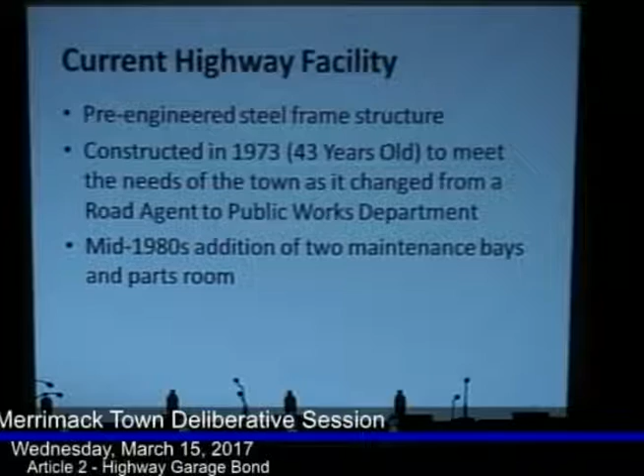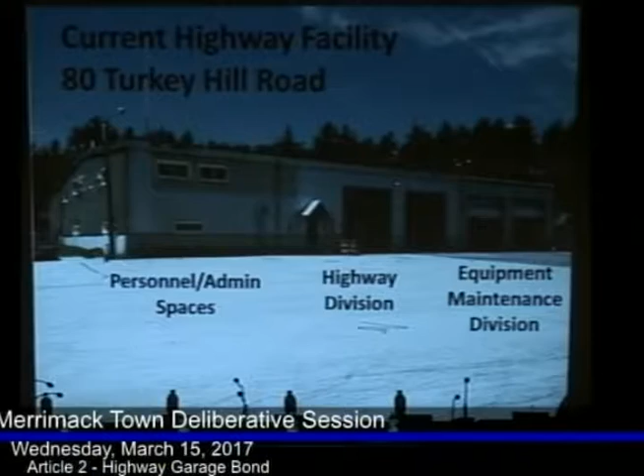That can be shown graphically over here on the right. It's hard to see, but I encourage everybody on your way out this evening to stop and take a look at our graphic boards over there. The one on the right shows graphically the roads that existed in 1973 when the garage was built, and the pink roads are all the ones that have been added since. That's just the public roads that we maintain - it doesn't include the private roads and the state roads.

The thing to particularly focus on is not just the length of road, because long straight roads are relatively easy to maintain. It's all of the intersections, the cul-de-sacs, and just the spread of the town. The town has gone from isolated pockets of population to being spread out over most of the area.

In that same vein, the board to the left shows the houses that existed in blue in 1973, and all of the pink spots are all of the houses that have been built since the highway garage was built.

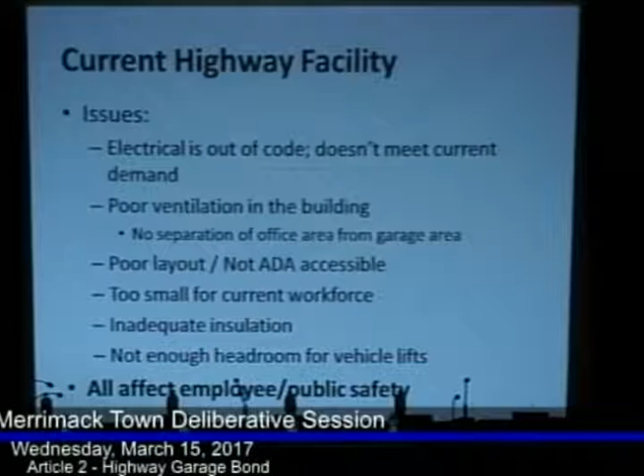There's poor layout, it's not ADA accessible, and it's just too small for the current workforce. There's also inadequate insulation and not enough headroom for vehicle lifts to lift vehicles properly. All of these affect employee and public safety. I'll stress that it's not just a building for us - it's also a building for the public to come in, vendors, contractors, and the like. So there's many folks other than just us in the facility.

Now I'm going to talk a little bit about what we're proposing in this project. We're planning to renovate the existing building - we're not tearing it down because it is still useful. As I mentioned at the beginning, it's a steel frame structure, and the steel is still in great shape. So our plan is to totally gut the building and use it primarily for vehicle storage. That will allow us to protect our $4 million fleet from the elements, resulting in a longer lifespan of our vehicles. It will also improve response time during winter storms.

Yesterday was a great example. When we left work Monday, we had all the trucks we could fit into the garage, and you'll see a picture of that coming up soon. Most of our fleet is outside, so when we get the call that it's time to plow, the operators have to come in, get the snow off of their truck, get the truck warmed up, take it over to the salt shed or the sand pile, get loaded with material, then they can go out. That can take anywhere from 45 minutes to an hour to accomplish.

Having vehicles stored inside, out of the elements, and in a warm place means we can preload all of the trucks. As soon as the guys get into the garage, they can be out on the road.

The other thing we would use the existing building for is to wash vehicles. We do that currently in the facility, and because of the high cost of a wash bay, we're proposing to still do that in the old building rather than add that into the new building as well. The estimated renovation cost for the existing building is about $439,000.

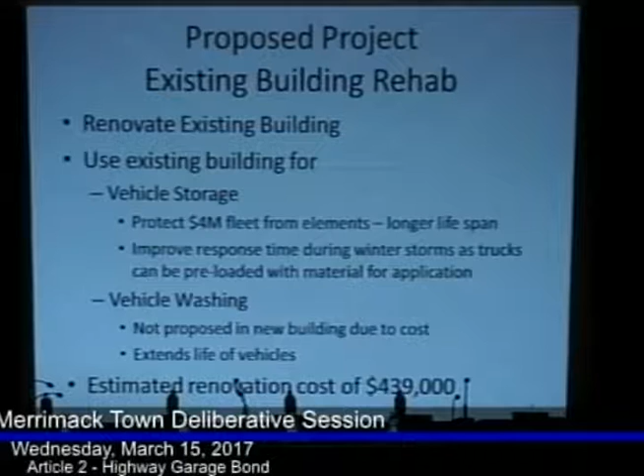One of the great parts about the project with the existing building being renovated is we're going to be able to take our heavy equipment, which now costs about $170,000 per unit for our six-wheel dump trucks, and extend our average life of them from 10 years to 12 years. That cycle will save us about $50,000 to $75,000 per year, and that'll be an ongoing forever savings.

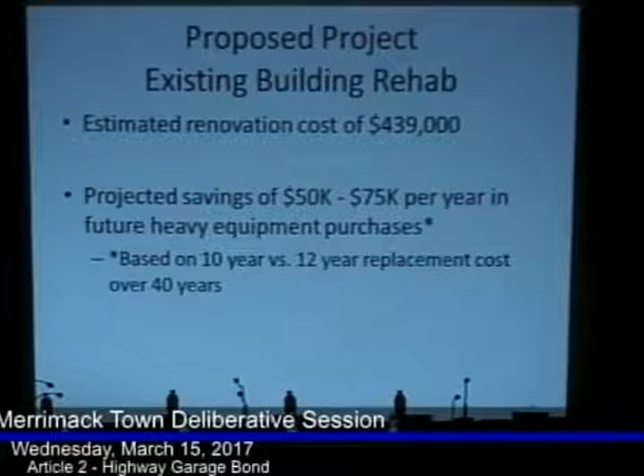Here's a picture of what the existing building might look like in the future. If you remember back to the original slide, we had that ugly steel-sided building, kind of an albatross in a residential neighborhood. We're proposing to change the siding of the building to a more residential feel, so it'll fit into the neighborhood much better.

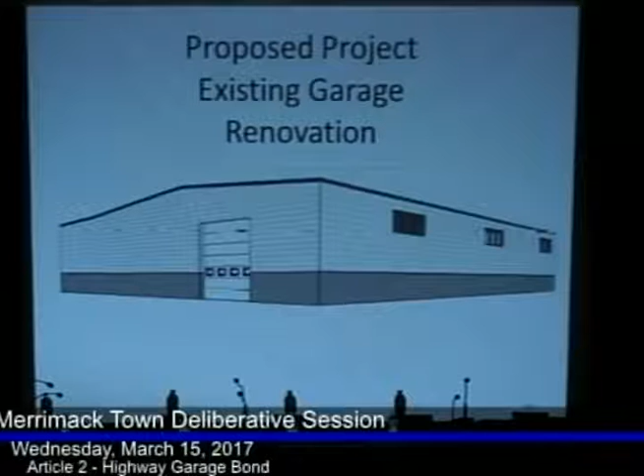The second part of the project is to construct a new building, and I'm going to talk about the 4 different areas of the new building, one at a time. The first area I'm going to talk about is the administration and office area, the conference rooms, and the entry vestibule. Currently, we have a little over 1,200 square feet in the existing building for this purpose, and we're actually decreasing this in the new building to just over 1,000 square feet.

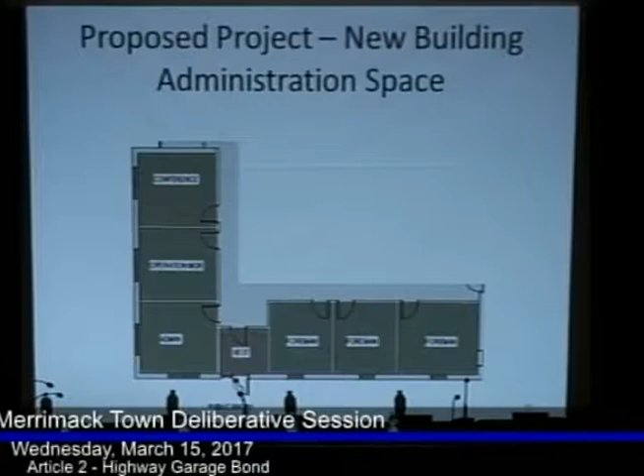Next, I'll move on to the common space, and this is really the biggest difference between the existing building and the proposed one. The new building will have adequate facilities, both male and female, for locker rooms, showers, and toilets, as well as public toilets, a much bigger lunchroom, training room, and kitchen area. Currently, we have just over 800 square feet for that, and we're almost doubling that at 1,700 square feet.

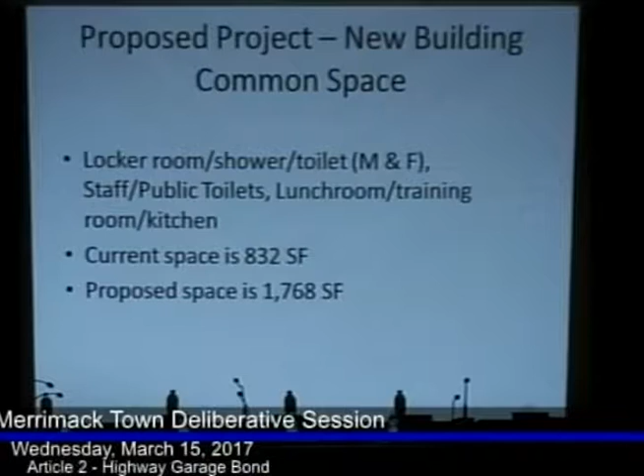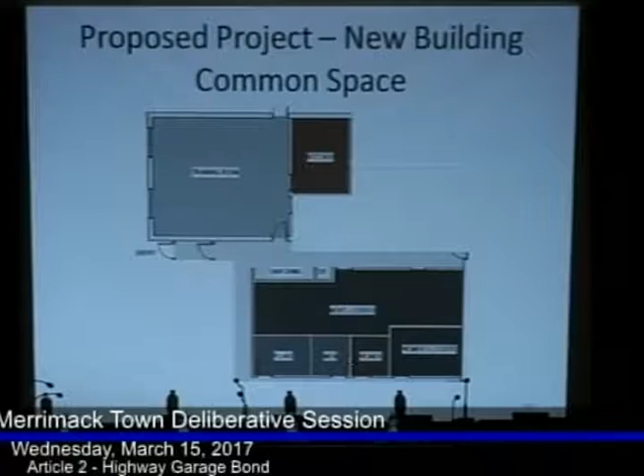What we're proposing is a much bigger training room with an attached kitchen that'll be sized to fit everybody, should we want to have a training meeting, lunches, and whatnot. They could pull out cots and have a couple couches in there to rest during storms like they went through yesterday. Additionally, there'll be men's and women's locker rooms, which will have shower facilities and restroom facilities in them, as well as an additional male and female restroom for public and other staff in the building.

The third area we'll talk about is the biggest part of the garage, and that's the maintenance bays themselves. That's the area where maintenance and highway shop functions are performed: the maintenance bays where equipment maintenance works on all the equipment, the air compressor room, tire storage, and parts and supply storage. Currently we have about 7,500 square feet, and we're bumping that up a little bit to almost 9,400 square feet.

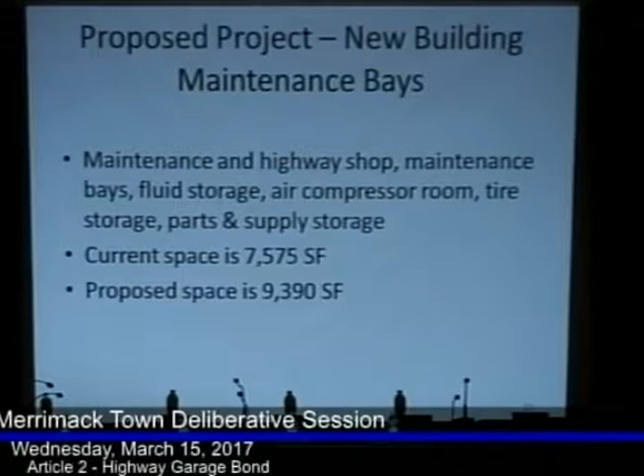Additionally, warming the vehicles from a cold start every storm does lessen its lifespan, so keeping the pieces of equipment warm is definitely good for them. They all have block heaters, so that's how we get them going during the cold weather.

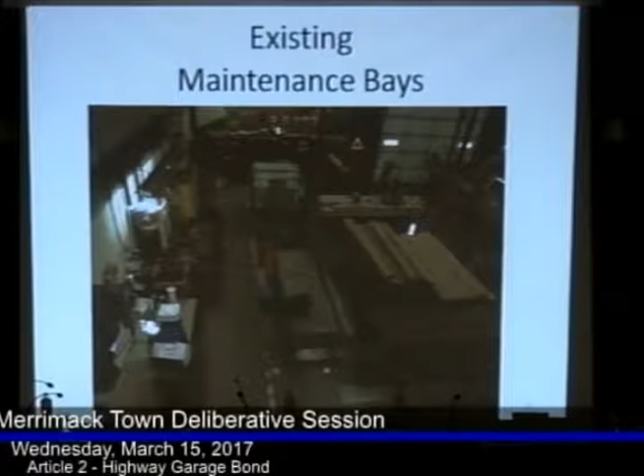Here's a view from the top of the staircase that you saw earlier, looking down at our overflow lunch table. Again, the chainsaws are on the left. And again, this is kind of our workspace. In the plan, we're calling this our highway workshop, when you take a look at the overall plan.

This is one of the current maintenance bays. This is a 6-wheel dump truck. It's a little difficult to see. On the handouts, it'll be a little easier to see, but up at the front, this truck has a wing plow on it, which all of our heavy trucks do. With the wing plow down in the shop, you can see there's no room for walking past it. So it definitely is a safety issue for trying to step around it or otherwise work in the area.

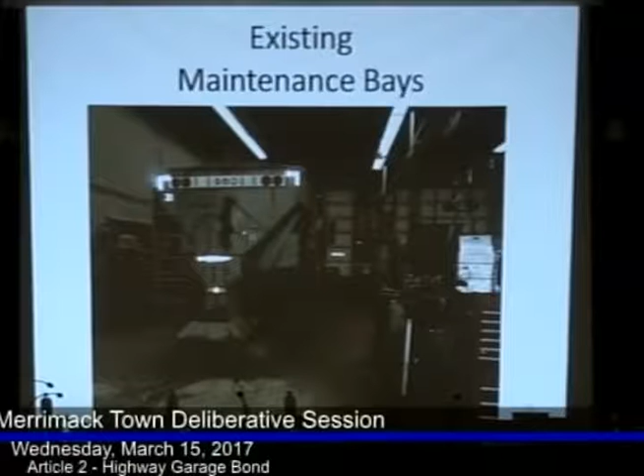The proposal would widen that gap between each bay by a couple feet to allow for that extra space.

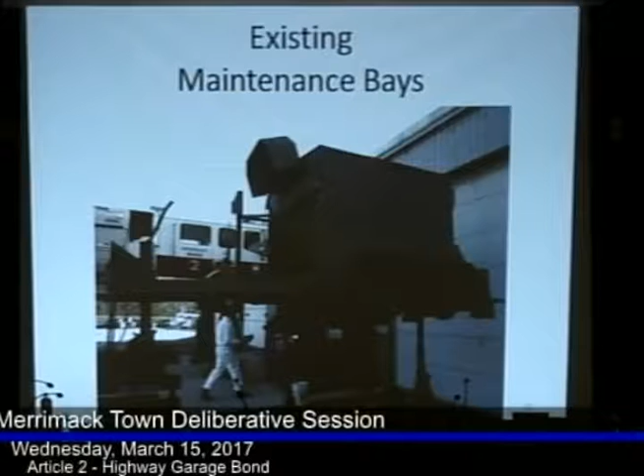This is an example of what happens when we have a piece of equipment we need to work on that there's not enough height in the existing bays to utilize. We have portable lifts that we drag outside onto a concrete pad, and we work on it outside. Obviously, in the winter, that's more difficult. The new project would have ample headroom space so we could work on everything inside.

And here's a picture of what we're proposing for the new maintenance bay part. The areas in blue are the highway maintenance shop, where we do all our welding and fabrication, our drill press and that kind of stuff. The grayish areas are storage for tires, parts, fluids, and the like, and some secure storage. And the yellow part is the equipment maintenance bays. You'll recall from the original picture, currently we have 4 bays, and we're proposing 4 bays in the new garage as well.

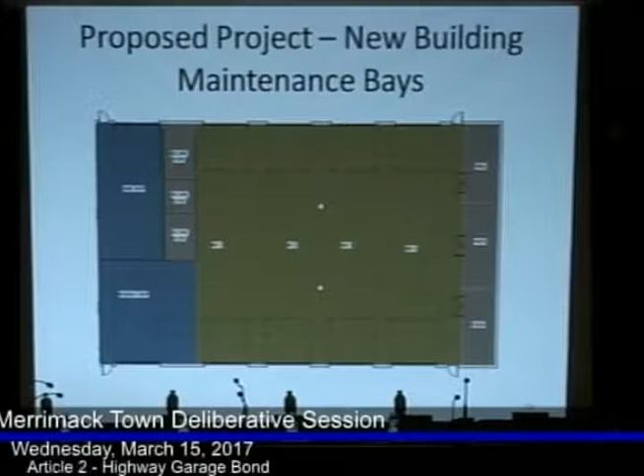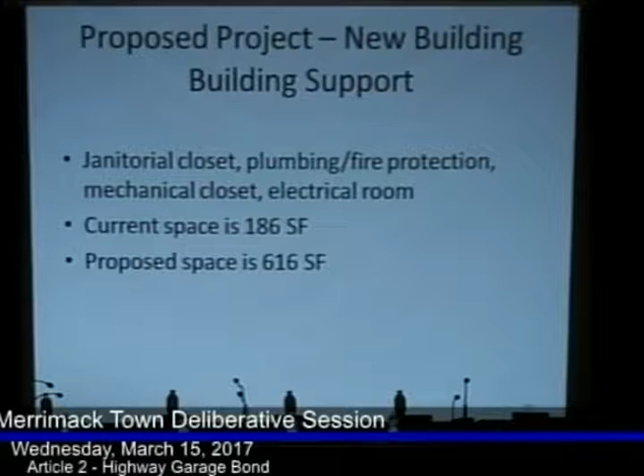The final part is the building support, and that's just the janitor closet, mechanical closet, etc. Currently, we have under 200 square feet, and we're proposing to go up to about 600 square feet.

Currently, we have our compressors and electrical room as the same room. Our hot water heater is in about a 2.5-foot square closet, not very easy to work on. Our alarm panel is jammed underneath the staircase in the back cold storage room.

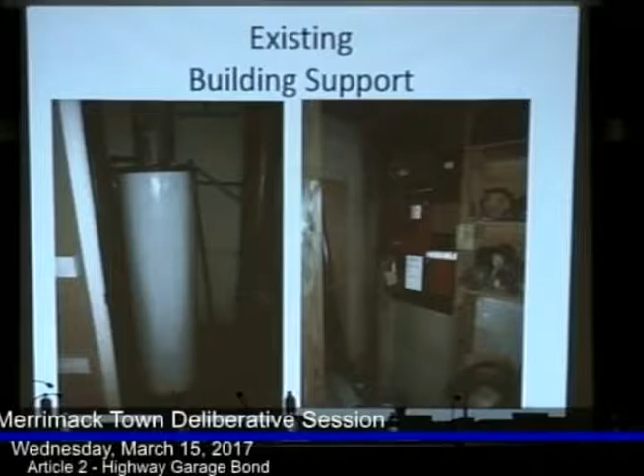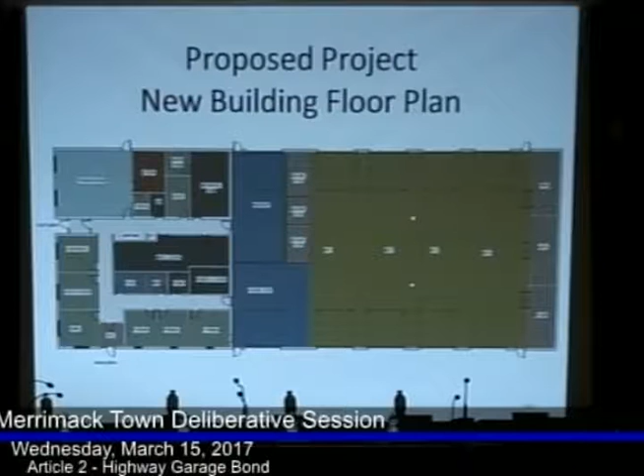This is the overall floor plan. Again, I encourage you to check it out on your way out. We've got a proposal board over there that shows the design.

Here's some pictures of what the new building could look like. Again, we're proposing a residential siding, so we fit into our neighborhood a little bit better than we do now.

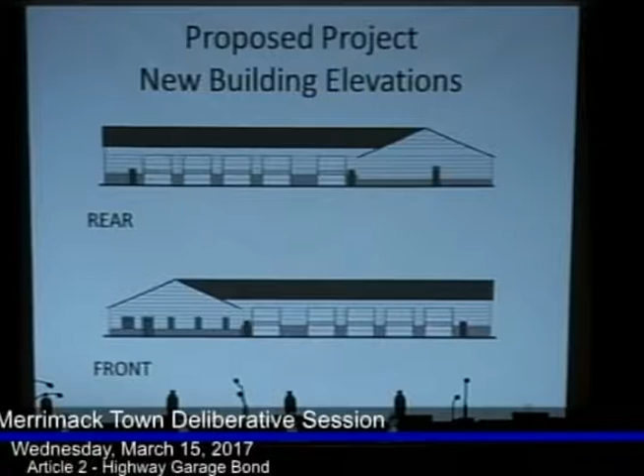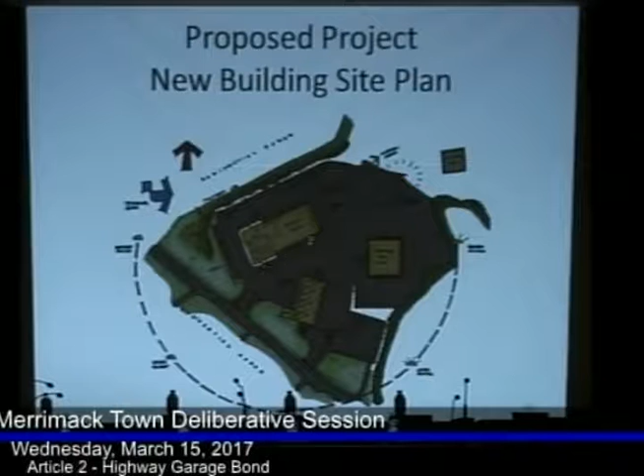The site will be the same. The building in the middle is the existing facility. The new building would be in the backyard, and the other big square building there is our salt shed.

The proposed cost of the project is about $3.2 million, and we'll be seeking a $3.3 million bond. That gives us a little room for the cost of goods going up from today's cost estimate to the time the project actually bids.

That figure matches in nicely with the expiring Greens Pond bond, which, as was mentioned, is expiring this year. The final payment on that bond is $270,000.

The net result of that is the tax rate for the final payment of the Greens Pond bond is 8 cents. The tax rate for the initial payment on the garage would be 8 cents, which would slide into the slot vacated by the Greens Pond bond.

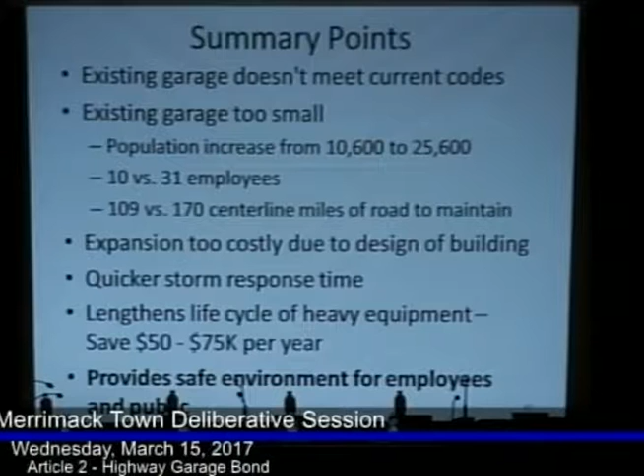Just a quick summary: the existing garage doesn't meet current codes, it's too small. Merrimack's population has grown tremendously in the past 43 years, and the employees working out of the garage to meet the needs of the extra people have gone up accordingly, as have the number and length of roads we have to maintain. Expansion of the existing building is too costly due to its design. We can get quicker storm response time with the proposal, and the life cycle of our heavy equipment can increase by a fair amount. We're projecting savings of up to $75,000 a year by doing so. And the most important point is it provides a safe environment for employees and the public who come into the facility. With that, I'll open it up to any questions.